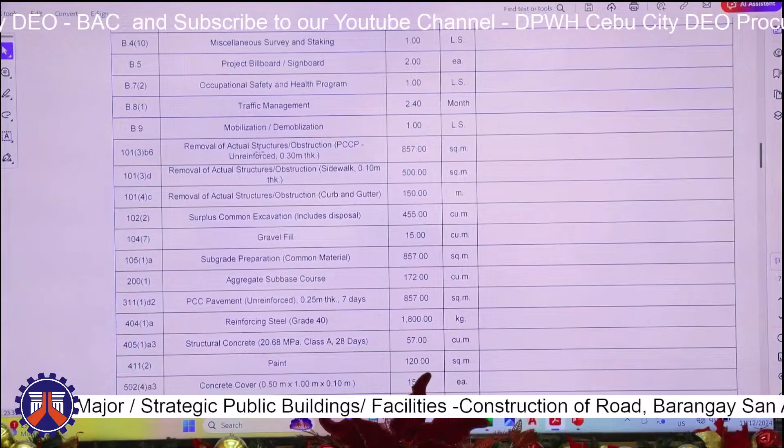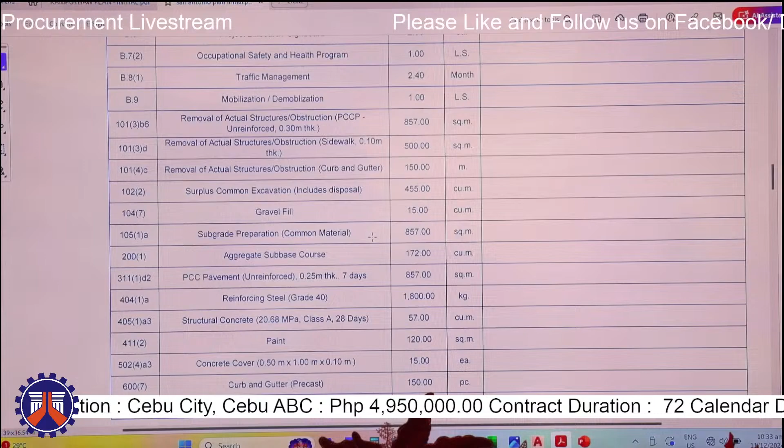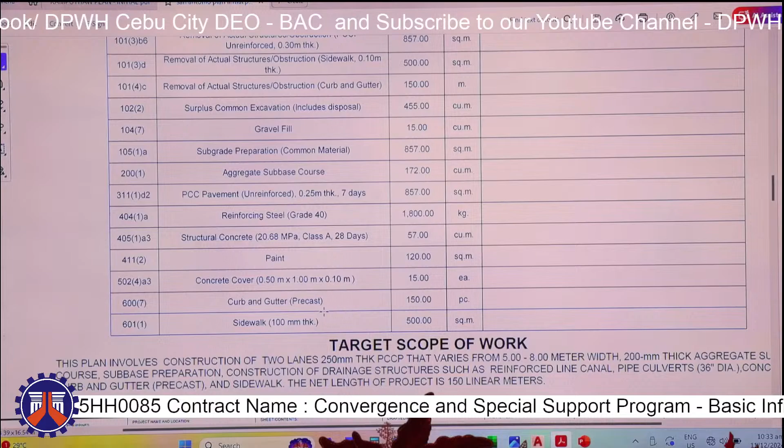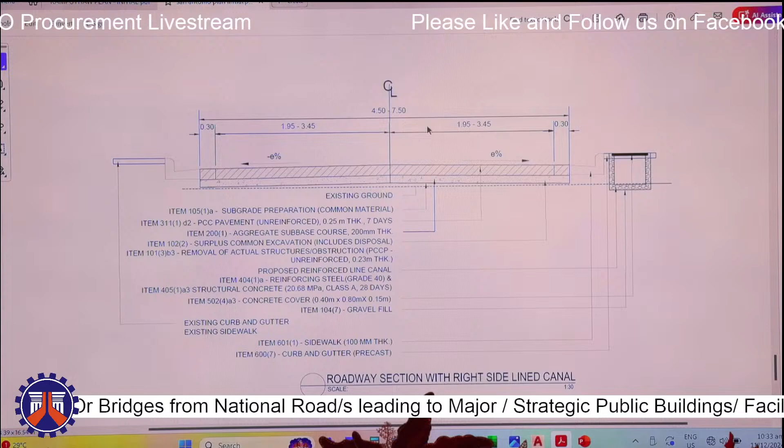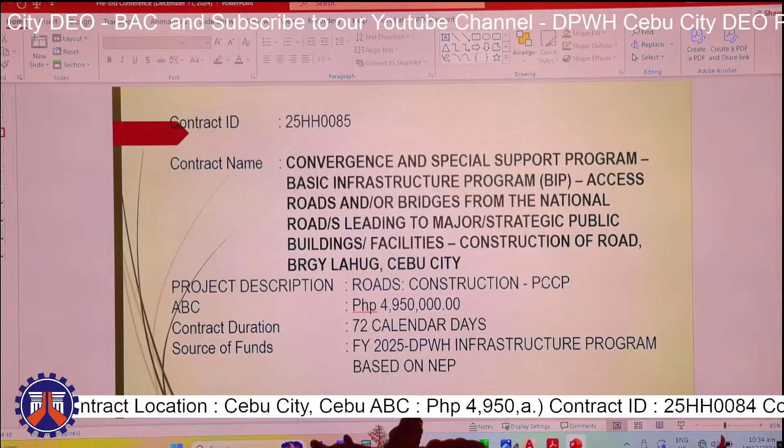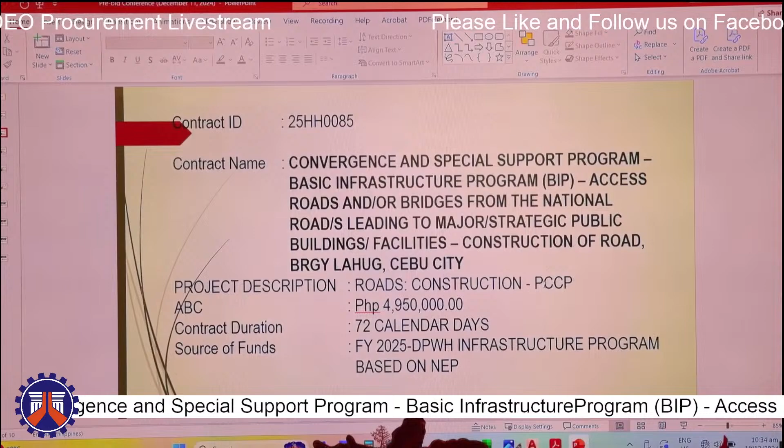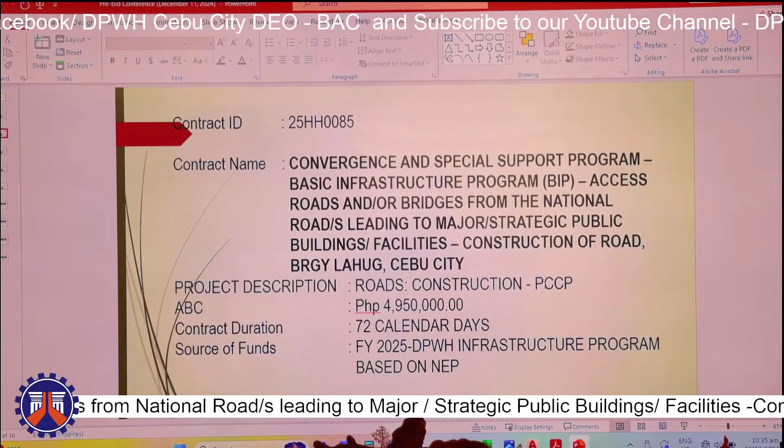Morning, everyone. I'm here to discuss the project with the contract ID 25HH0085, with the contract name Convergence and Special Support Program, Basic Infrastructure Program, access roads and/or bridges from the national roads leading to major strategic public buildings or facilities, construction of road, Barangay Lahug, Cebu City. Its project description is roads, construction, PCCP, with approved budget of contract of 4,950,000 pesos and contract duration of 72 calendar days, and its source of funds being FY 2025 DPWH Infrastructure Program based on NEP.

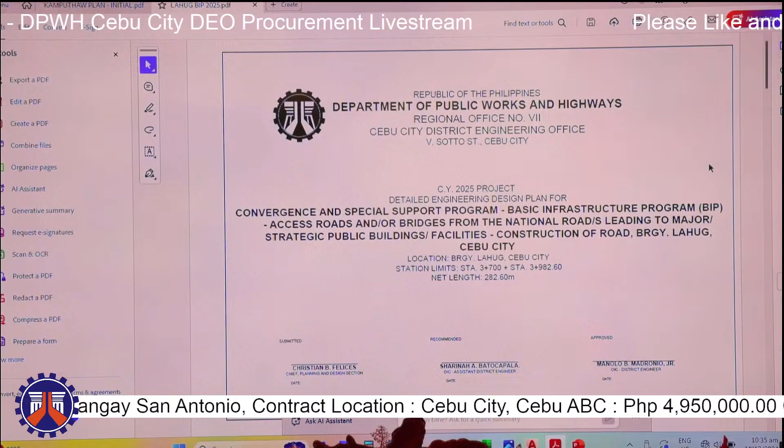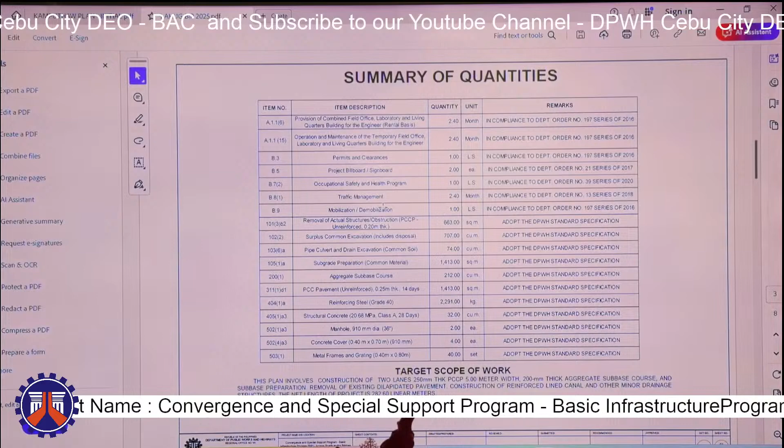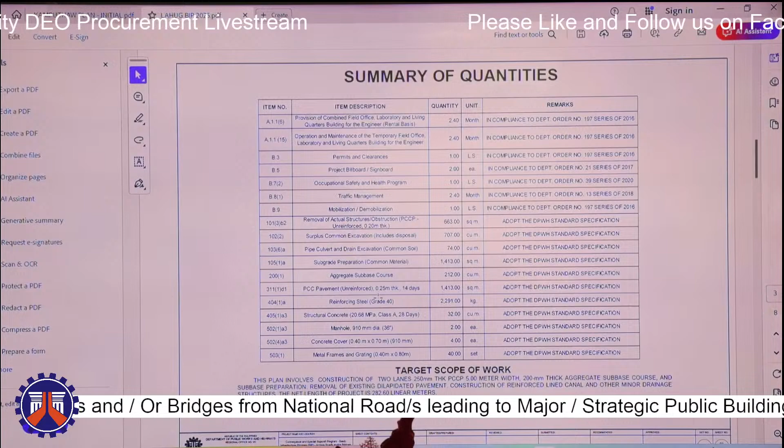So here you will see the location of the project is in Barangay Lahug with its station limits 3,700 to 3,982.6, with net length of 282.6 meters. Here you can see its location with its geotagged photos as well as its coordinates. Here you will see the summary of quantities with its major scope of work including removal of actual structures or obstruction, PCCP, surplus common excavation, pipe culvert and drain excavation, subgrade preparation, aggregate sub-base course, PCCP with 0.25 meters thickness, 14 days curing, reinforcing steel grade 40, structural concrete, manhole, concrete cover, and metal frames and grating.

And here is our general notes and technical specifications included in this project. And lastly, this is the project's typical road section. That's all.

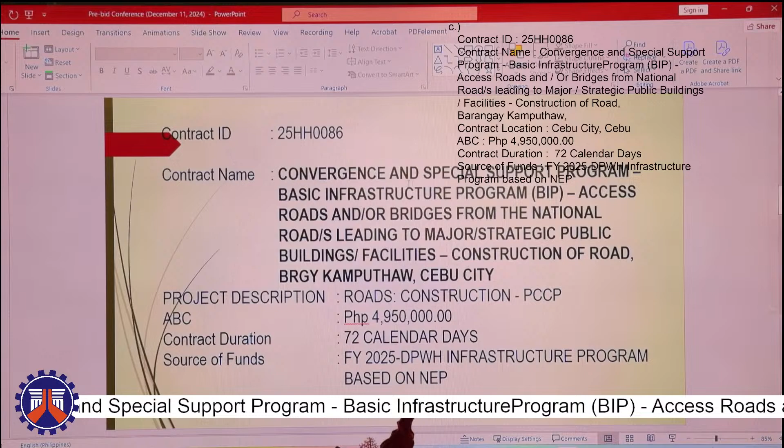Contract name, Convergence and Special Support Program, Basic Infrastructure Program, BIP, access roads and or bridges from national roads leading to major strategic public buildings facilities. Construction of road, Barangay Kamputhaw, Cebu City. Project description is roads construction PCCP.

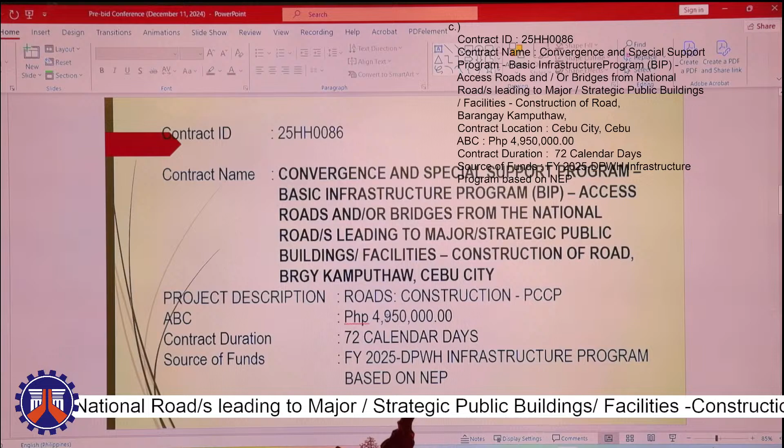The approved budget for the contract is 4,950,000 pesos. Contract duration is 72 calendar days. Our source of fund, FY 2025 DPWH Infrastructure Program based on NEP.

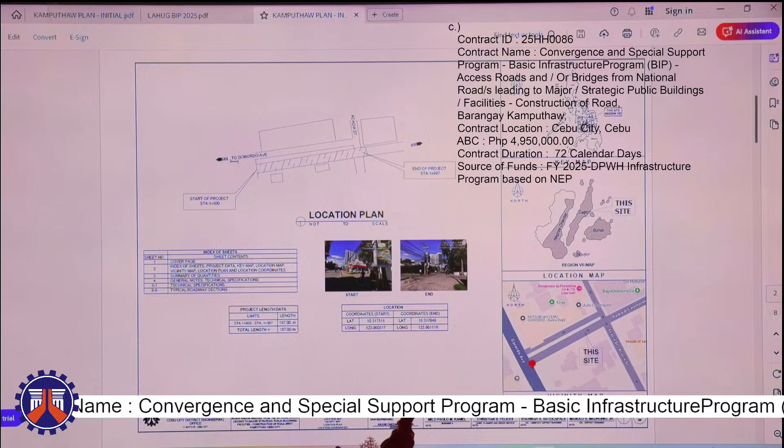Here's our plan. Cebu, Gorordo. This one here is Gorordo Avenue. Our project is along Pedro D. Calomarde Street. This one.

And we have our photos here from the start of the project and the end. Our geotag coordinates here.

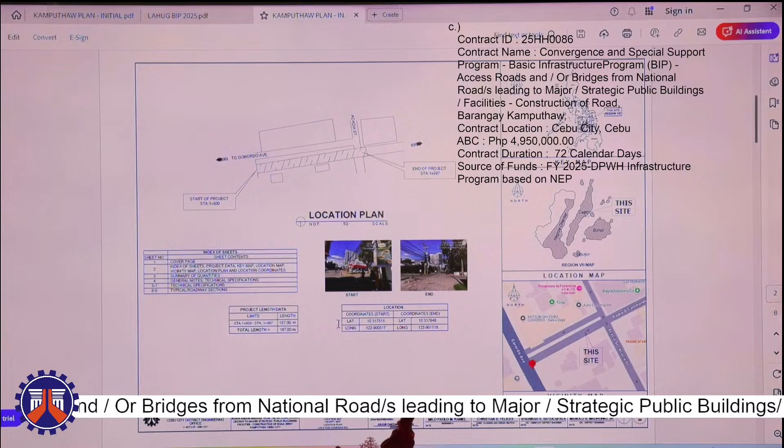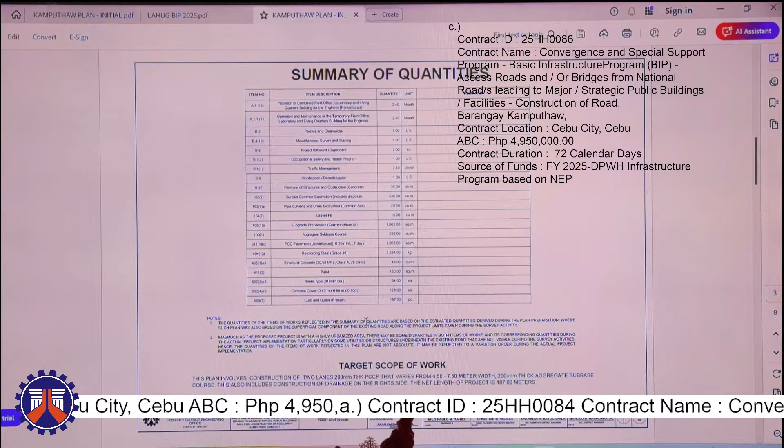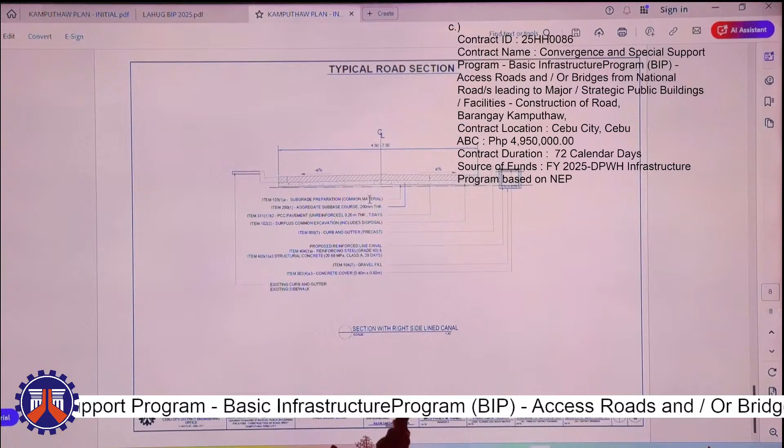concrete pavement. We have the surplus common excavation, subgrade preparation, aggregate sub-base course, 200 mm thick, PCCP pavement, unreinforced 200 mm thick, 7 days curing. And on the right side, we have the curb and gutter precast.

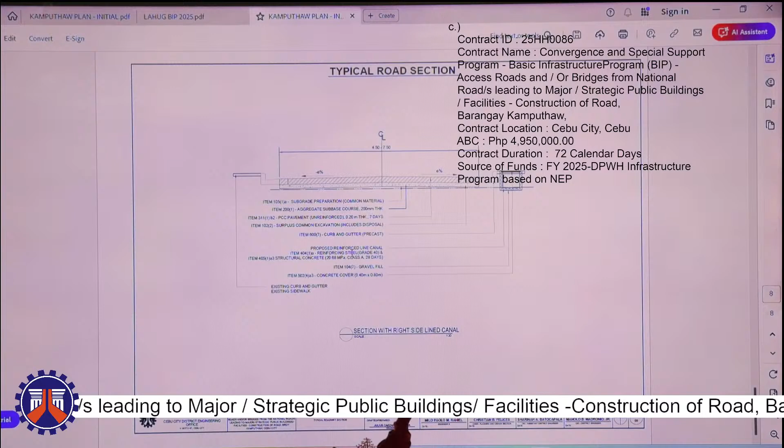And for our drainage structure, we have reinforcing steel, grade 40, and structural concrete, 20.68 MPa, Class A, 28 days. And that's all. Our next project.

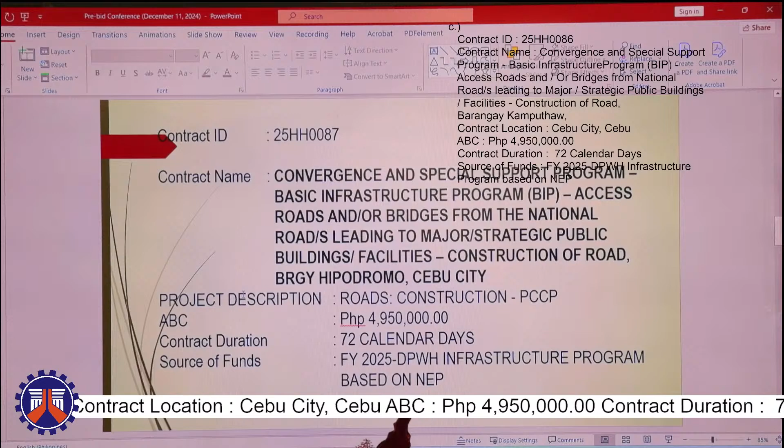So this is the project with the contract ID 25HH0087 with contract name Convergence and Special Support Program, Basic Infrastructure Program, access roads and or bridges from the national roads leading to major or strategic public buildings or facilities, construction of road, Barangay Hipodromo, Cebu City.

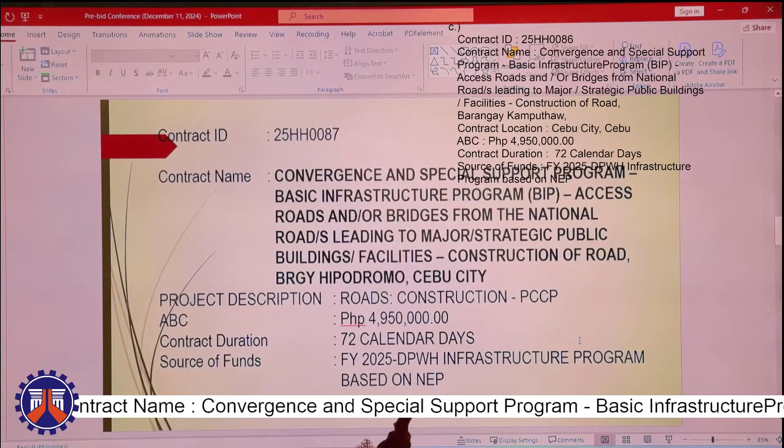With its project description, roads, construction, PCCP, and approved budget of 4,950,000 pesos, contract duration of 72 calendar days, and its source of funds being FY 2025 DPWH Infrastructure Program based on NEP.

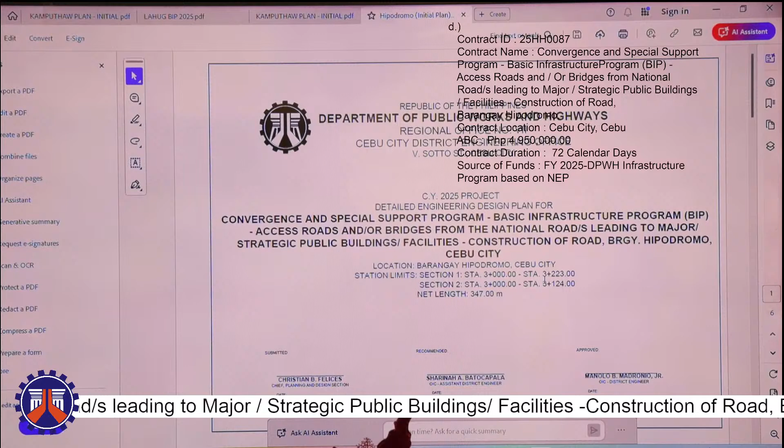So, our project is located in Barangay Hipodromo, and it consists of 2 sections from 3,000 to 3,223 and until 3,124 with its net length of 347.

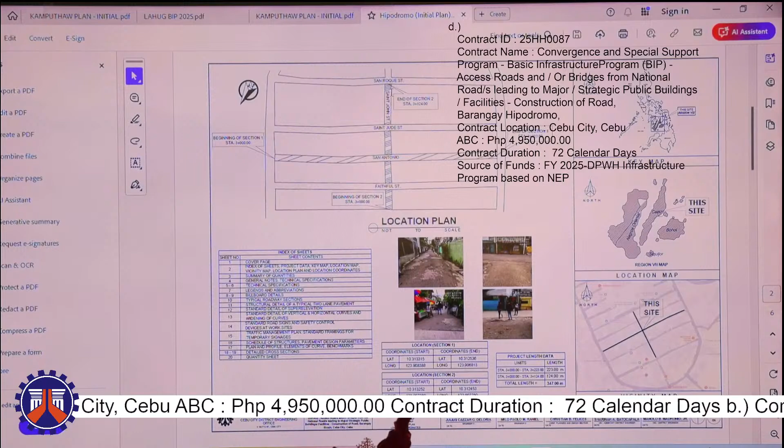Here, you will see Barangay Hipodromo. Our first section is located in San Antonio Street, while the second one is in Saint Jude Street, here. So here is our geotagged photos for easy navigation to our site location, as well as its coordinates here.

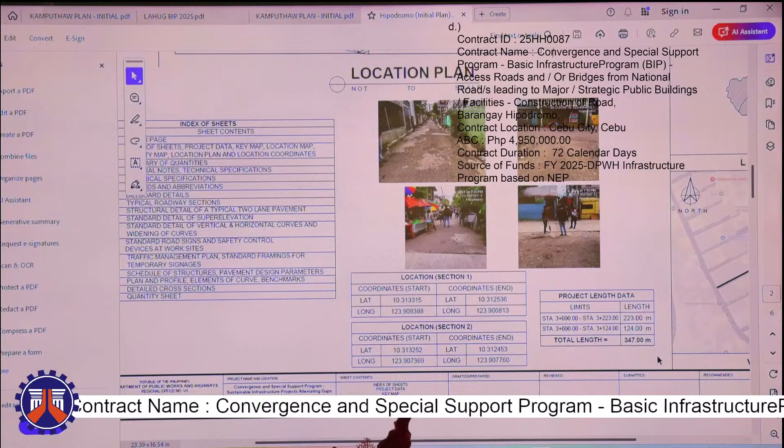Both sections add up to a total length of 347 meters.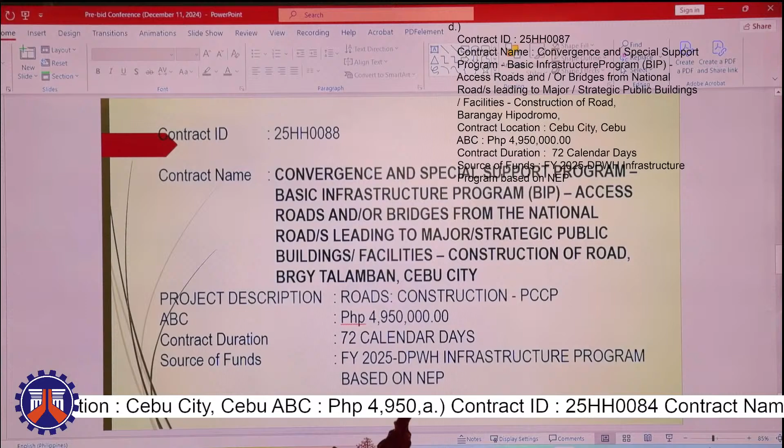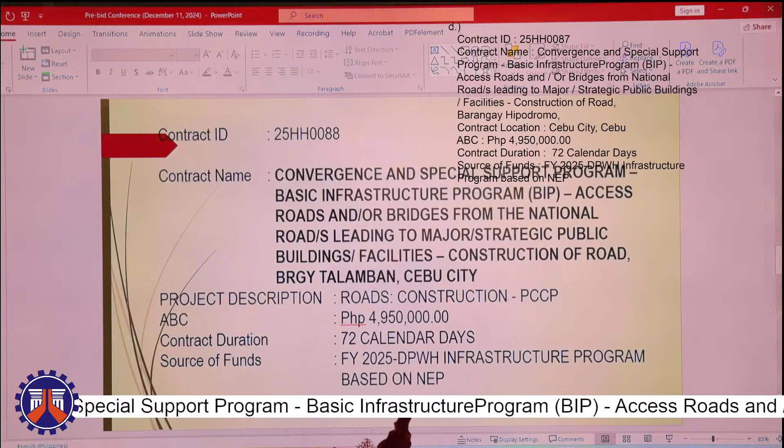So next with the contract ID 25HH0088 with the contract name Convergence and Special Support Program, Basic Infrastructure Program, access roads and or bridges from the national roads leading to major strategic public buildings, facilities, construction of road, Barangay Talamban, Cebu City, with an ABC of 4,950,000 and a contract duration of 72 calendar days.

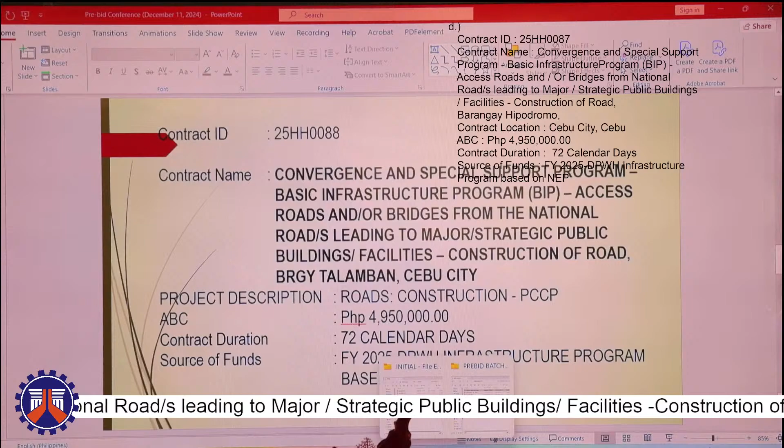So the project has two sections with station limit 8,000 to 8,110 and section 2 being 7,600 to 7,652 with a total length of 162 meters.

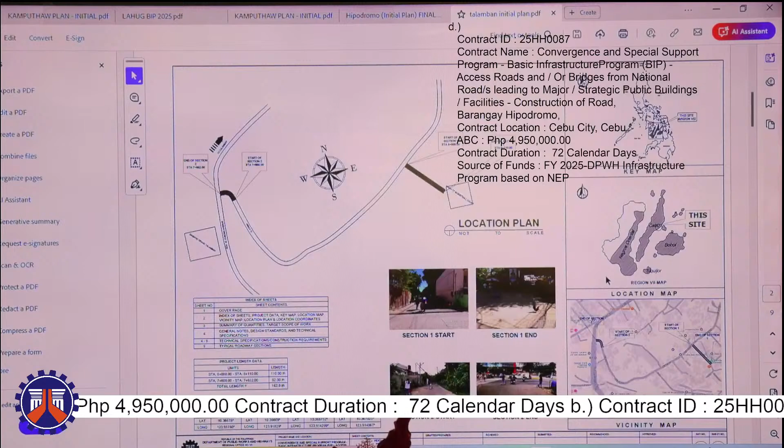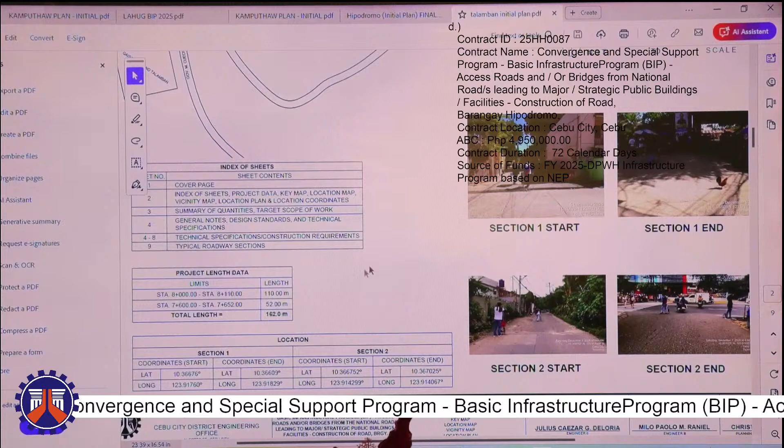So the location map shows the two locations of the project as well as the specific pictures to easily locate the start and the end of the two sections, and coordinates are provided as well.

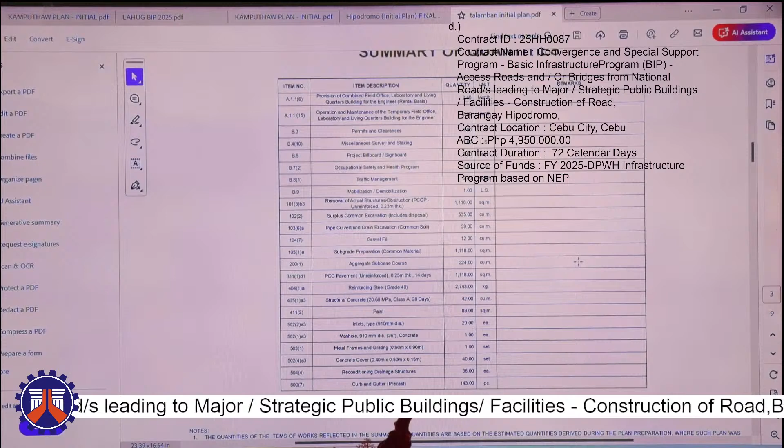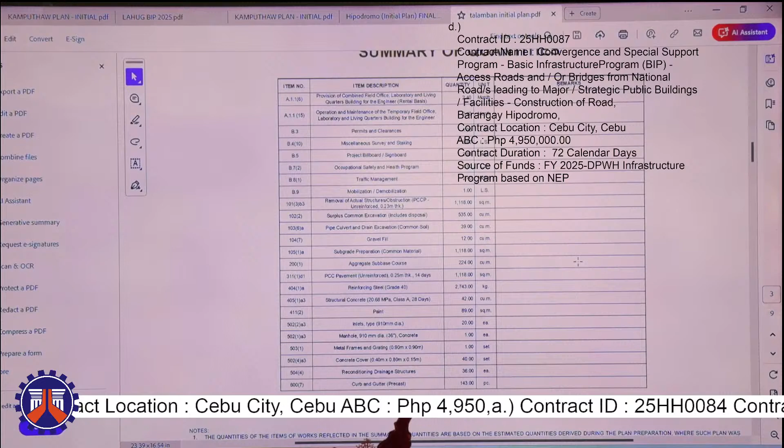Here is the summary of quantities with the usual items and their specific quantities, and then the major scope of work of the project involves removal of existing PCCP, surplus common excavation, pipe culvert excavation, gravel fill, subgrade preparation, aggregate sub-base course, PCCP, 0.25 thickness, 14 days, reinforcing steel, structural concrete, paint, inlets, manhole, metal frames and grating, concrete cover, reconditioning of drainage structures, curb and gutter.

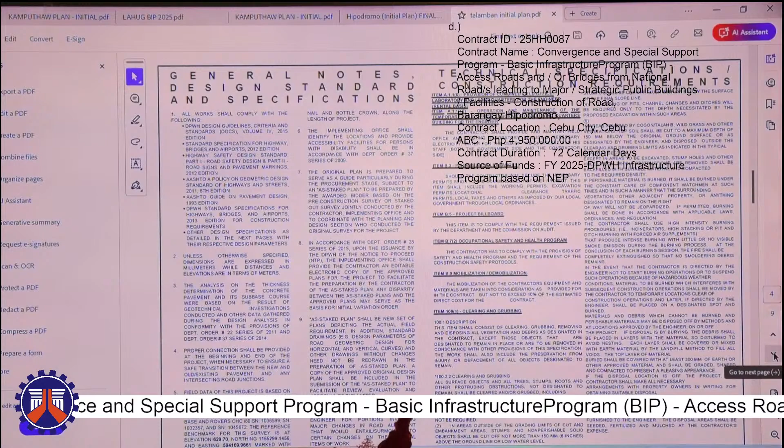The next pages will show the general notes and design specifications, and this is the typical cross section of our project.

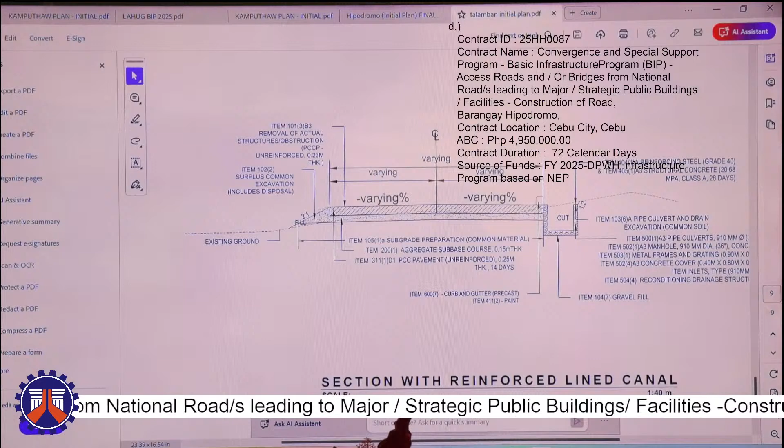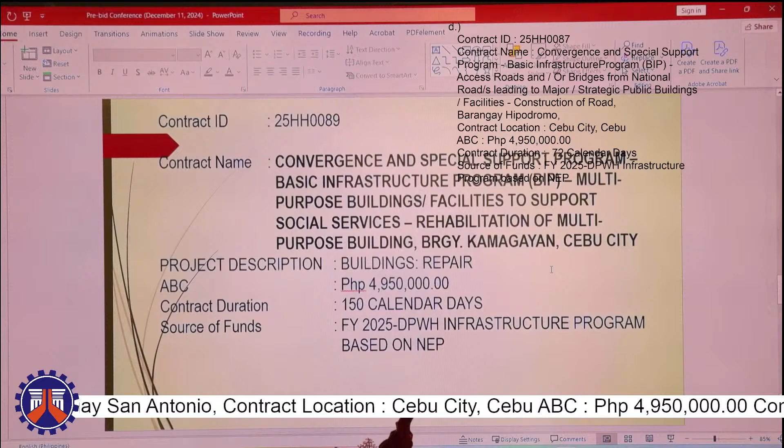Good morning. For the building project, contract ID 25HH0089 with a contract name of Convergence and Special Support Program, Basic Infrastructure Program or BIP, multipurpose building facilities to support social services, rehabilitation of multipurpose building, Barangay Kamagayan, Cebu City, with its project description as building repair.

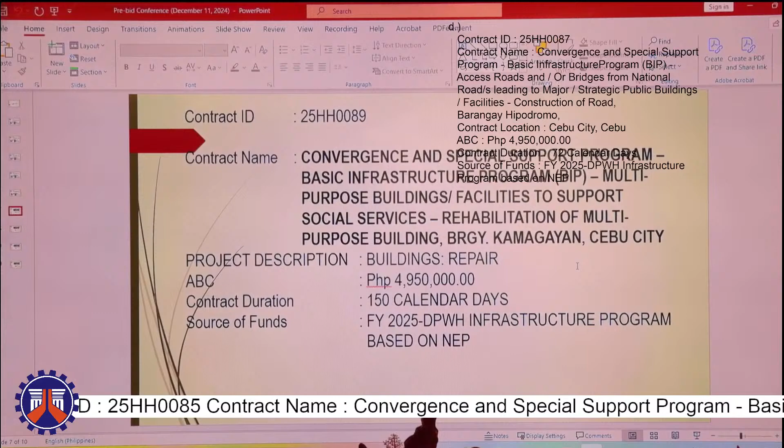Its ABC is 4,950,000. Its contract duration is 150 calendar days, and its source of fund is FY 2025 DPWH Infrastructure Program based on NEP.

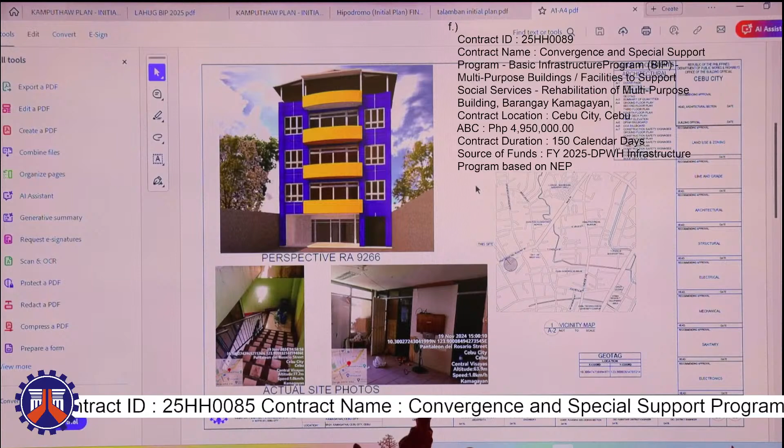Okay, so this is the plan. The project is located at the old Kamagayan Barangay Hall, near the University of San Carlos Main, along Pantaleon del Rosario Street. Its main scope of work is for the ground floor, addition of glass wall for the new senior citizen area and booster pumps.

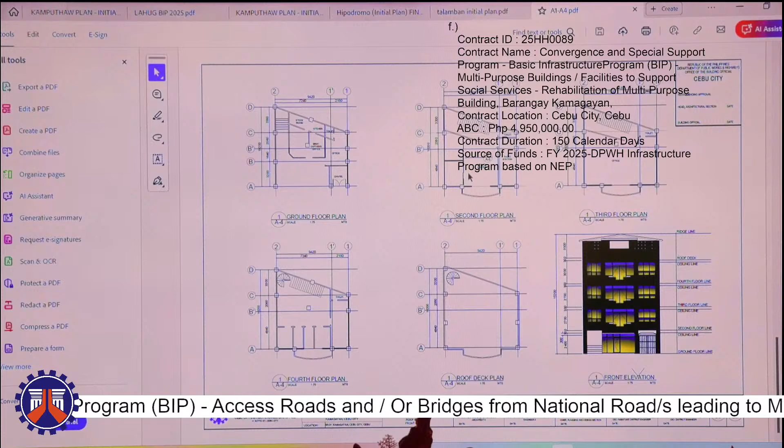For the second floor, it is the remove and replace of existing wall for the LGBTQ office. The third floor is to remove and replace the glass wall for their function hall, and the fourth floor involves removal of the existing walls for their multipurpose space.

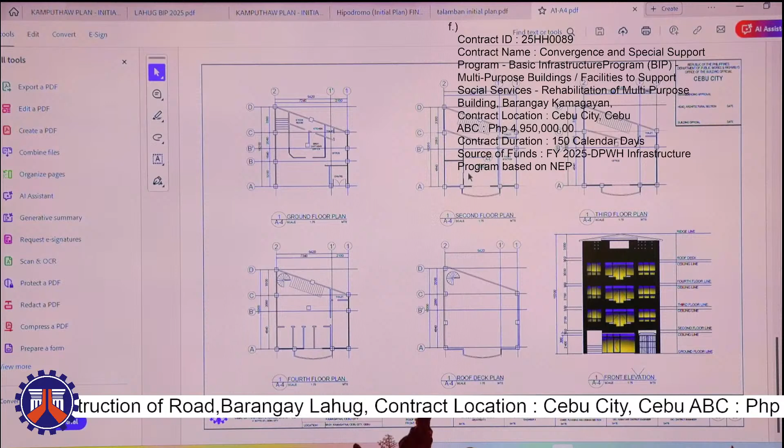The roof deck will have a new roof since it was destroyed by the storm, plus addition of overhead tanks. Additionally, there is remove and replace of plumbing fixtures from ground floor to fourth floor, and electrical fixtures. So that's all. Thank you.

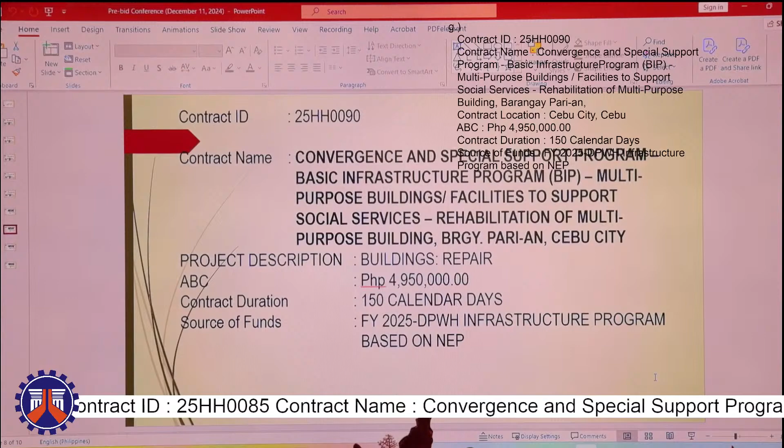Next, for building project, contract ID 25HH0090, with contract name Convergence and Special Support Program, Basic Infrastructure Program, Multipurpose Building, Facilities to Support Social Services, Rehabilitation of Multipurpose Building, Barangay Parian, Cebu City.

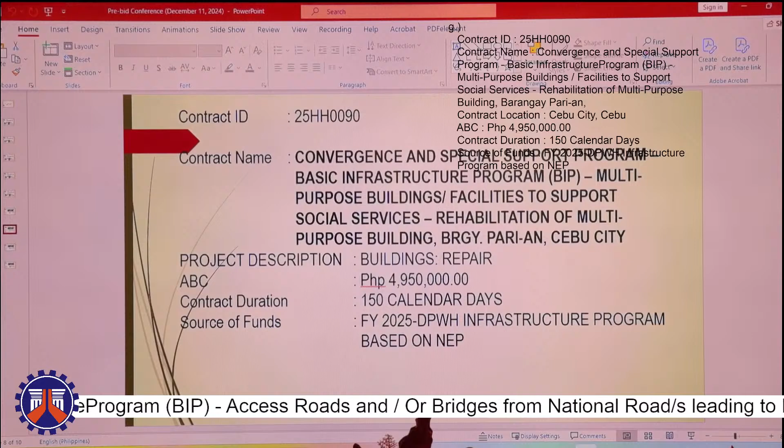Project description: buildings repair, with approved budget for the contract of 4,950,000. Its contract duration is 150 calendar days, and source of fund is FY 2025 DPWH Infrastructure Program based on NEP.

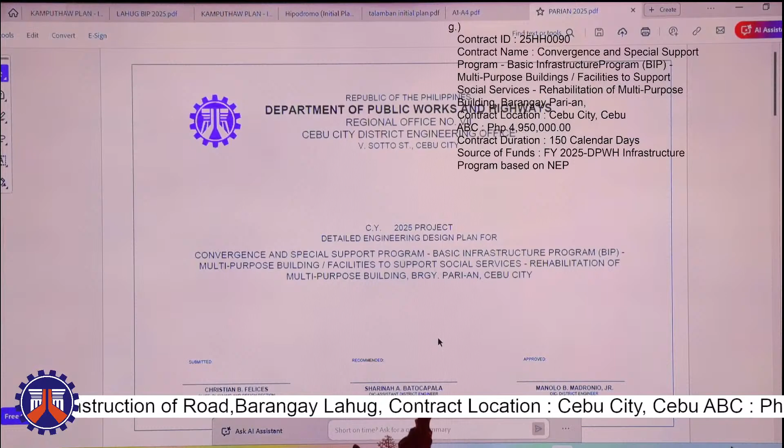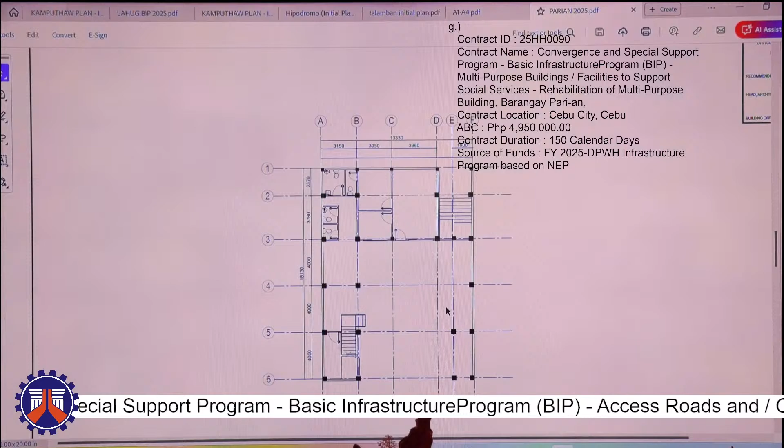The project is located at Barangay Parian Health Center. Its main scope of work consists of painting of interior and exterior walls at the ground level, installation of new tiles at the ground floor, electrical fixtures at the ground floor, and installation and painting of ceiling works.

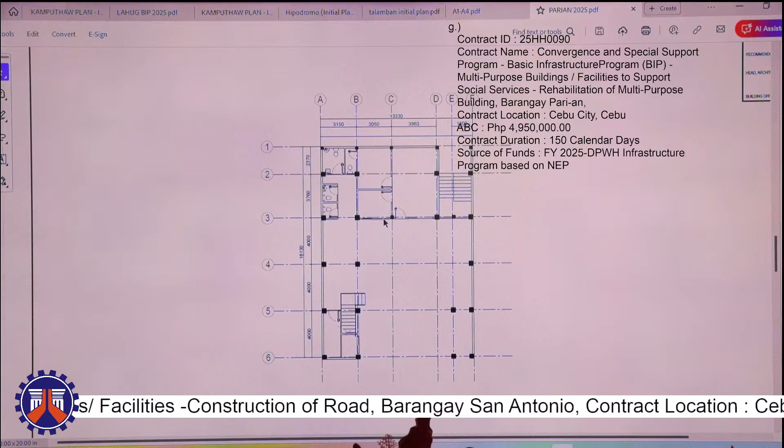Next is installation of a canopy at the facade, painting of doors also at the ground floor level, and fabrication of a gate at the front side of the building. That's all for Barangay Parian.

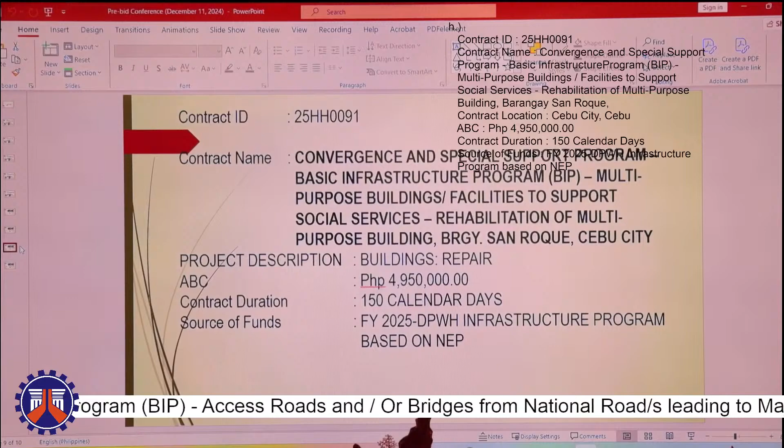Let's proceed with contract ID 25HH0091, Convergence and Special Support Program, Basic Infrastructure Program BIP, Multipurpose Buildings or Facilities to Support Social Services, Rehabilitation of Multipurpose Building, Barangay San Roque, Cebu City.

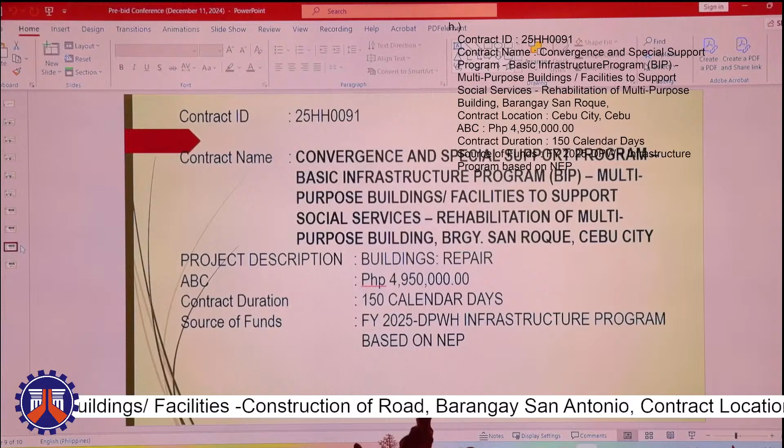Project description: buildings repair. The approved budget of contract is 4,950,000. Contract duration is 150 days. Source of funds: FY 2025 DPWH Infrastructure Program based on NEP.

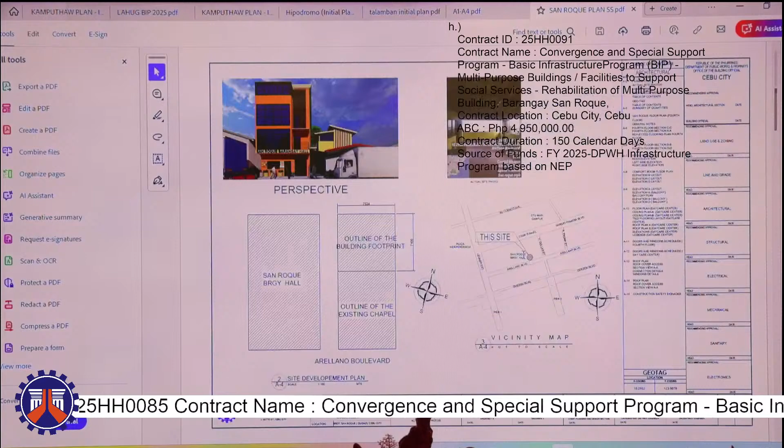So here is the plan for Barangay San Roque Multipurpose Building. Here we can see the rendered perspective of the project and the actual site photo. In the vicinity map, we can see that the project is located along Arellano Boulevard.

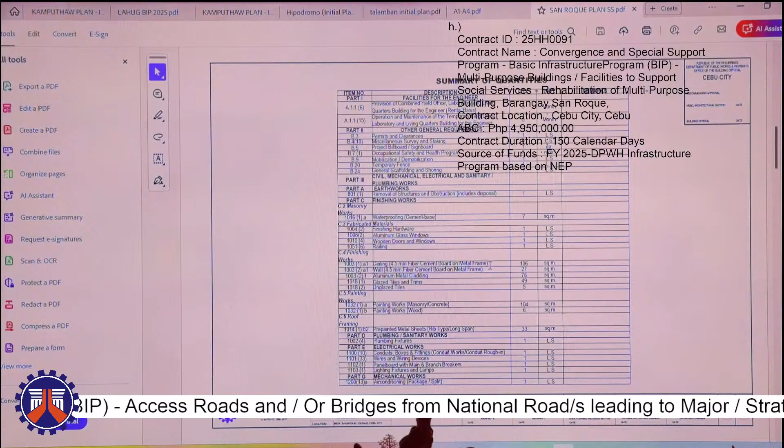Then we have the summary of quantities. The major scope of work of the project includes ceiling works, electrical works, and roof framing. So that includes...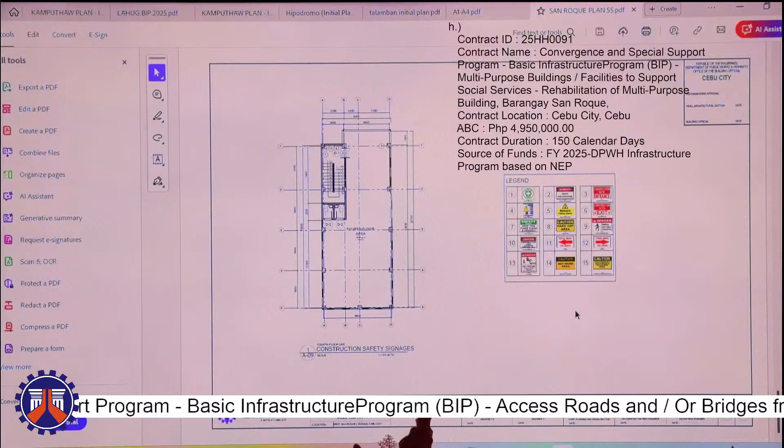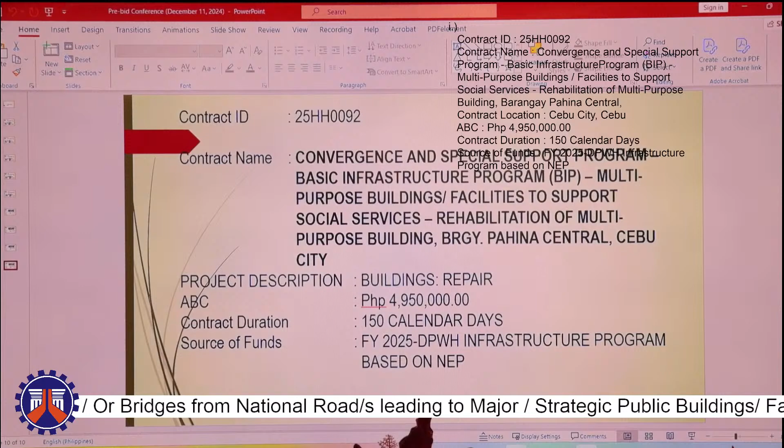Good morning. Contract ID 25HH0092. Contract name: Convergence and Special Support Program, Basic Infrastructure Program, BIP. Multipurpose building facilities to support social services. Rehabilitation of multipurpose building, Barangay Pahina Central, Cebu City.

Project description: buildings repair. Approved budget of the contract is 4,950,000. Contract duration is 150 calendar days.

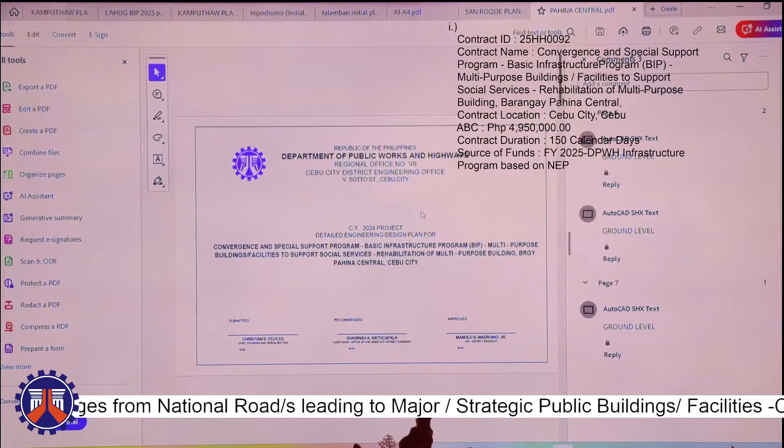The site development plan of Barangay Pahina Central. Here's the perspective and the vicinity map. The location is at Barangay Pahina Barangay Hall at Pahina Central, Cebu City.

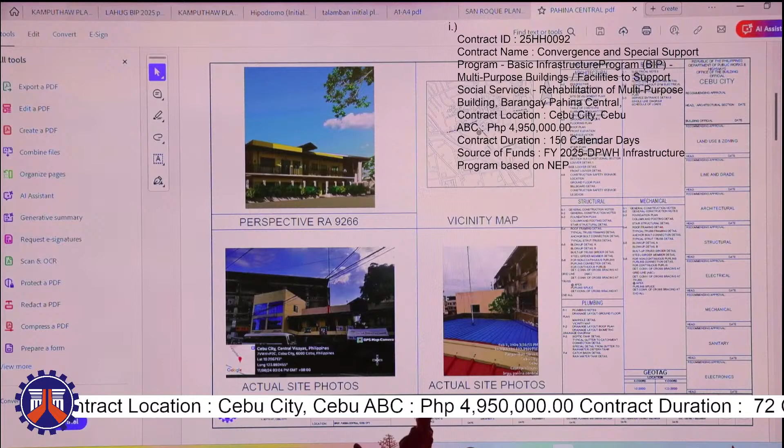Target scope of works includes removal of structures and obstructions, structure excavations, embankment and gravel fill, reinforced concrete works, finishing works, and plumbing and electrical works. Here is the floor plan.

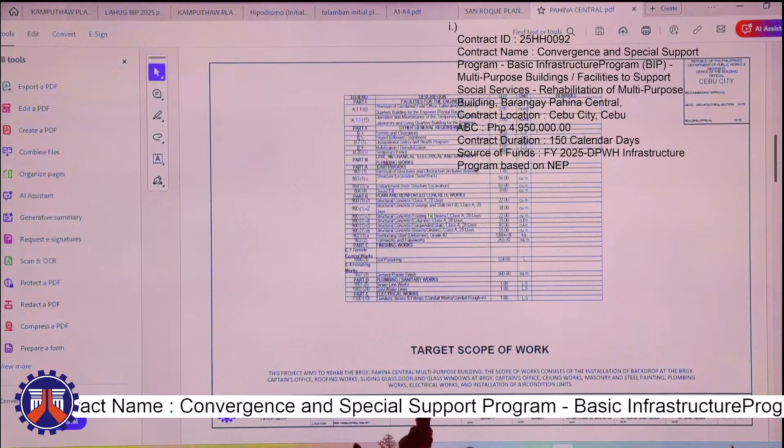The removal consists of the daycare and senior citizens quarter, or barangay captain's office space. It also includes removal of ceiling works for electrical installation, and replacement of plumbing fixtures at CRs at ground floor and second floor.

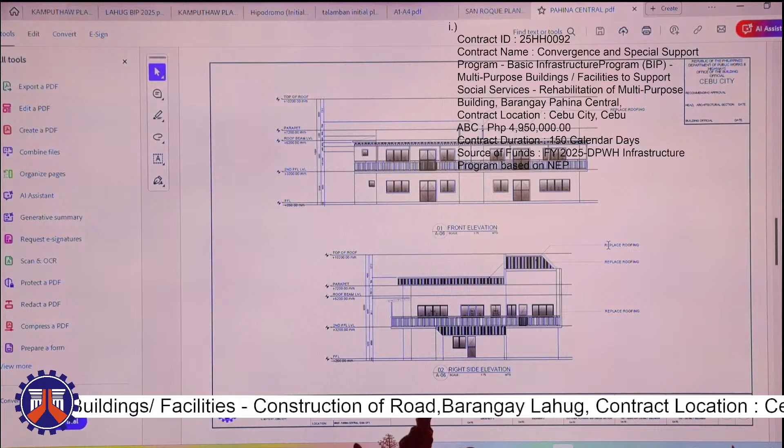Here is the elevation, front and right side. This also consists of repainting of walls, all exteriors and interiors. That's all.

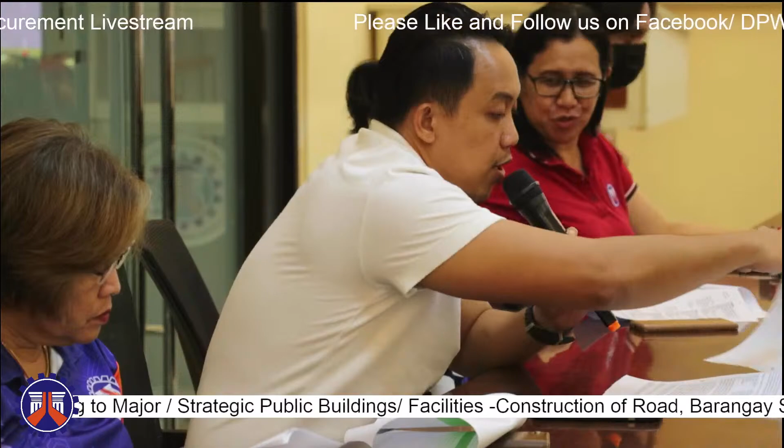Second, Filipino citizen or 75% Filipino-owned partnership or corporation with PCAB license applicable to the type and cost of the contract. Third, completion of a similar contract costing at least 50% of ABC.

Fourth, net financial contracting capacity at least equal to ABC. Last, letter of authority for the representative or liaison officer as reflected in the CRC to submit bids.

Bidding will be conducted through open competitive bidding procedures using non-discretionary pass or fail criteria in the eligibility check, preliminary evaluation of bids, detailed evaluation of bids, post-qualification and award, as specified in the 2016 Revised Implementing Rules and Regulations of Republic Act 9184, otherwise known as the Government Procurement Reform Act.

The contract shall be awarded to the lowest calculated responsive bidder, or LCRB, who was determined as such during post-qualification.

If at the time of the post-qualification procedure, the BAC verifies deficiencies due to the contractor's fault or negligence pursuant to Rule 10, Section 34 of the 2016 Revised Implementing Rules and Regulations of Republic Act Number 9184, the procuring entity shall disqualify the contractor from award, without any right to reimburse fees and incidental cost paid for the procurement of infrastructure contract subject of the bid.